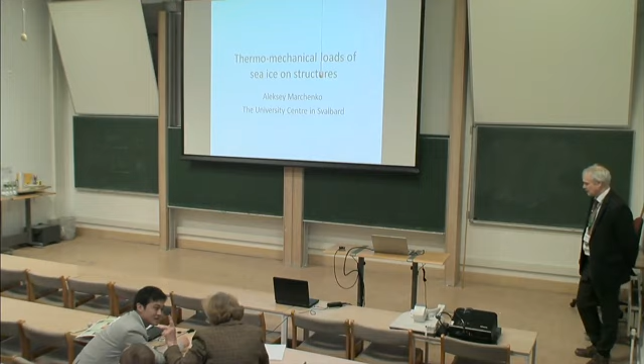Presentation is by our chairman, Aleksey Marchenko, titled Thermo-mechanical Loads of Sea Ice on Structures. One hour, please. Yeah. So I built up my presentation in

three portions. In the first portion I will give information known from the literature, and in the second part I will describe 3 examples of such type of interaction observed in Spitsbergen, and the biggest part, the last part, is the analysis of that interaction. The information about ice-structure interaction you may find, for example, in the book of Sanderson, and

he said that there are 2 types of interaction when temperature is changed. Ice expands and may produce loads on the construction if ice is confined inside the construction. And the second type of interaction is when ice is partially confined between a local structure and, for example, the shoreline. In that case, ice thermal expansion will influence load on the structure.

He also mentioned that, of course, thermal load could be big, but there is a time for temperature to penetrate inside the ice due to heat transfer, and this time is not short. For example, to get to 1.5 meter depth, we need almost 100 days. Therefore, weather changes may influence ice temperature, but not very deep.

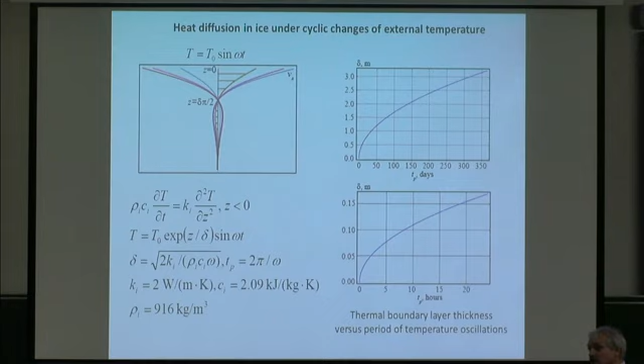So then, if you go for deformation of ice, if temperature penetrates deeply into the ice over some time, then creep could be important, and therefore thermal loads are significant only when temperature changes suddenly. If temperature changes slowly, thermal loads are reduced due to stress relaxation.

In this simple model, which is formulated for thermal loads, thermal loads are in balance with elastic stresses and creep stresses with a representative constant and power law with n equal to 3. You see that if the representative time is, say, 10 hours, and you have a significant change of temperature of a few degrees, then creep is very important.

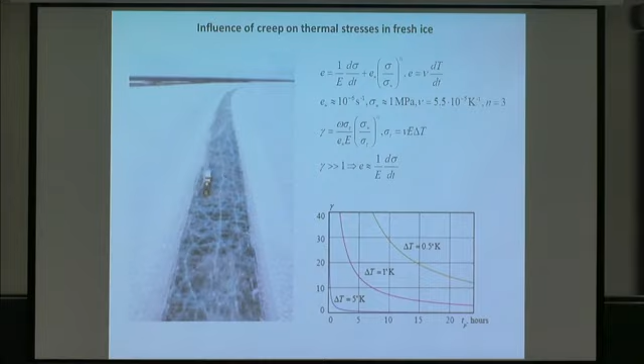If it is just 1 Kelvin degree, then creep is not so much, but still should be taken into account. Therefore, we have a combination of the coefficient of thermal expansion, creep, and temperature diffusion. So then, what do we have in practice in Spitsbergen?

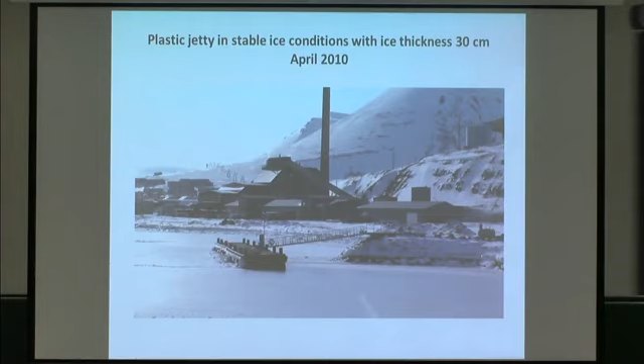What example? Here you see a floating pier, and it should survive over winter time, and in summer time it is used. Now it is much bigger. We don't have ice in the last years, but this was 2010. What we have in winter time, and what was not accounted for in the book of Sanderson, is tidal variation of water level.

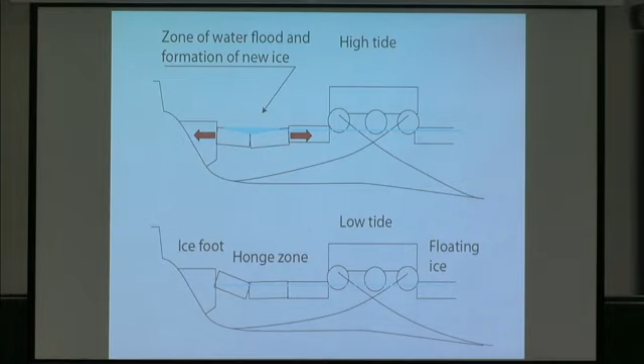Tidal variation of water level influences the formation of a hinge zone between the ice foot, which is frozen to the shore, and ice which is moving up and down. Inside the hinge zone we have a system of cracks, and the water penetrates through these cracks, freezes inside between the cracks, and pushes the structure offshore. For example, in 2011 the gangway was cut to avoid significant damage to the power cable.

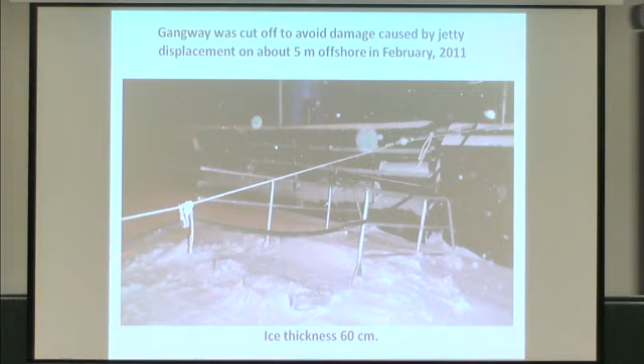Another example of combined action of tidal elevation of water level and ice creep offshore. You can see here there are 2 pipes. I installed these pipes with a thermistor string inside; I wanted just to compare temperature. One pipe was closed at the bottom, another not closed. Just wanted to measure temperature.

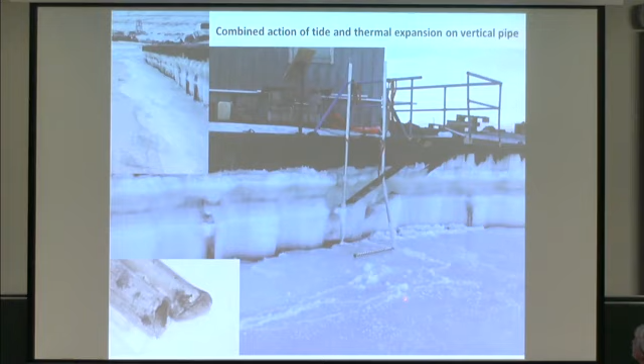One pipe was at the edge of this bridge; that is a small boat harbor, and here we have this bridge, and one pipe got into the gap between floating ice and the wall, and this pipe survived. The other pipe was broken in 2 weeks. The ice was a little bit creeping, at the same time moving up and down. That influenced bending, then the pipe was broken.

I call it cofferdam, and these cofferdams were filled with soil. The depth of water inside the cofferdam is 5 meters, and outside is 15. So that is like big columns. We discovered significant deformations of these cofferdam walls. This displacement was about 1 meter, from laser scanning. In winter time, this quay is not used, and ice is formed in the sea, and ice is formed inside the cofferdam.

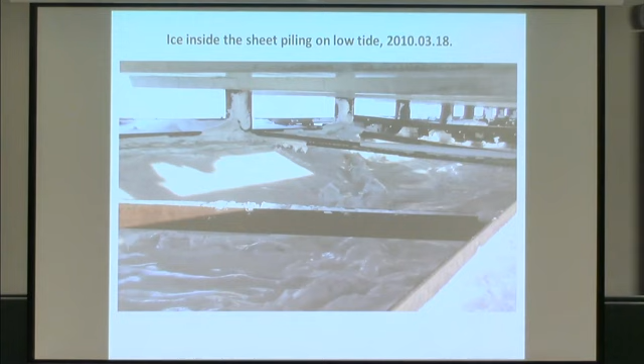So then you see in the figure how it looks when we have low tide. Then you see how it looks when we have high tide. So with the tide, the seawater penetrates through the ice, and the places where it penetrates are sometimes visible, sometimes not.

So the thickness of the ice inside the cofferdam is 2-3 meters. The thickness of ice in the sea is always less than 80 centimeters. And this big thickness is explained by this migration of water which freezes on the surface and not only on the bottom.

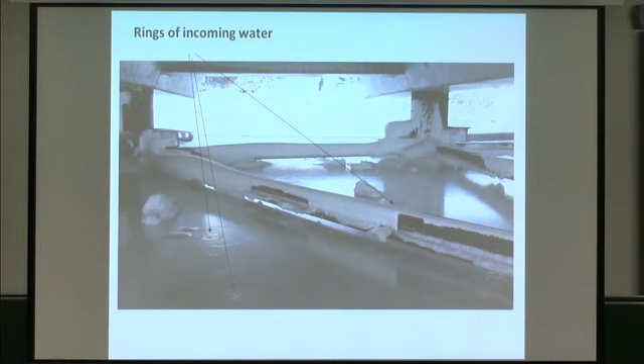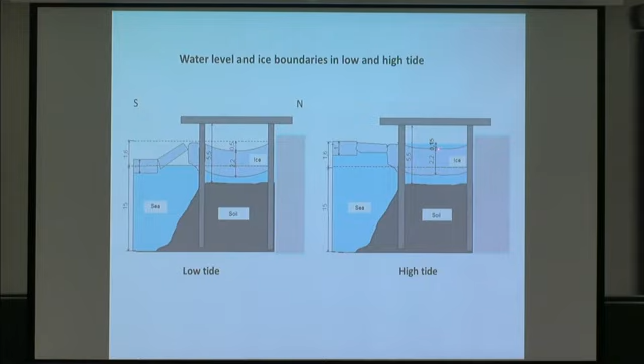So this is the schematic of what we have at low tide: we have this ice confined, hanging. At high tide we have water on the surface, and this depth can reach 15-20 centimeters. So, the structure of ice. We have very granular ice with small grains below the quay, and this is a horizontal section of floating ice in the sea.

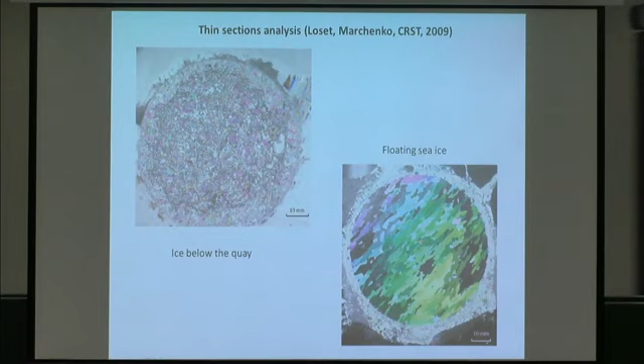So we observed significant variation of salinity from low water to high water. When the water level is going up, we have an increase of ice salinity. So I want to show

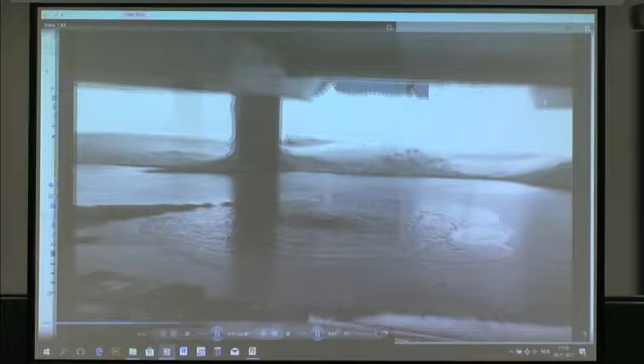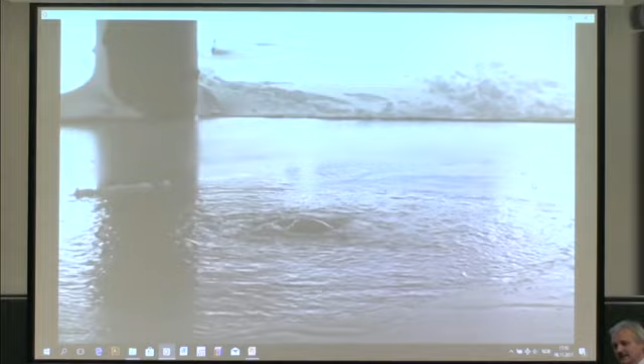if we drill through the ice, we did it once, then we have this situation. This is a hole drilled through the ice with an auger, and we got water coming and coming, and it never stopped. If we don't drill, then it is coming, but not with this fountain.

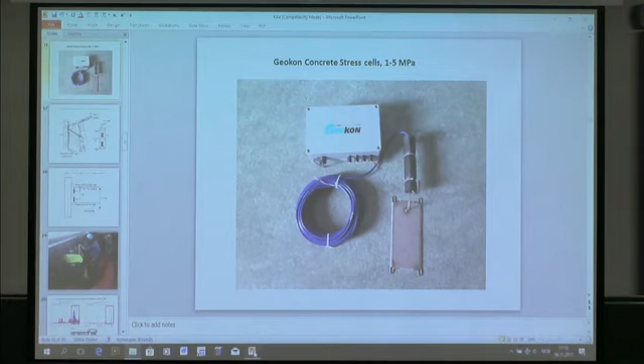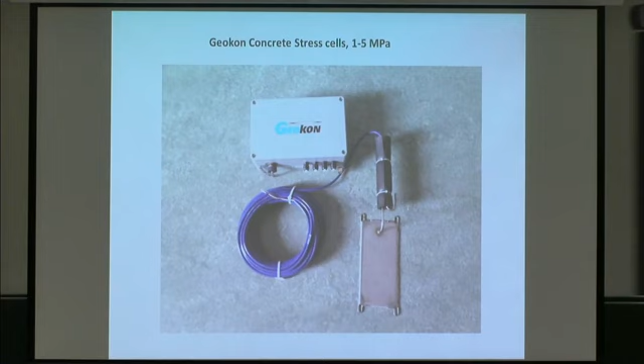So then we decided to investigate stresses exerted by ice on the walls of the cofferdam, because initially we were not sure that it came from the ice. Maybe these deformations were related to soil actions, because we have a big amount of soil inside. So we deployed these load cells on the walls of the cofferdam: this wall, which has significant deformation, and this seaside wall.

So here we screwed these load cells to a U-shaped beam, and then we brought this beam and screwed it to the sheet piling. You see the configuration: we wanted to have these loads below the water level. Therefore we needed to screw that with bolts to the sheet piling, and the most important thing was to fix

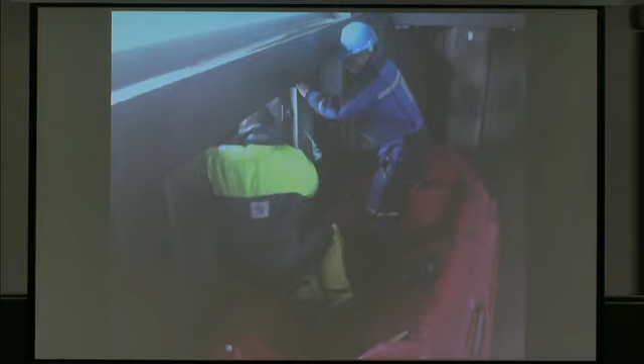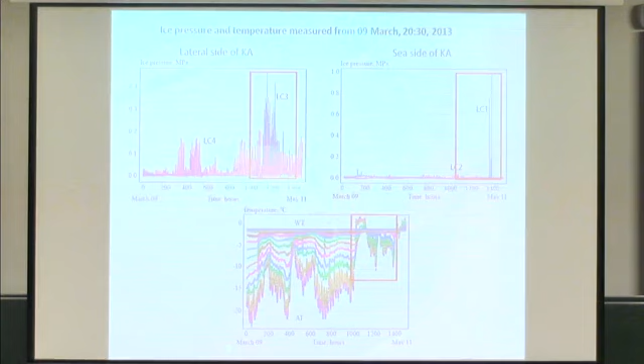the bottom bolt, because it was only possible to do at the lowest tide, and the lowest tide is in November, a completely dark time. So we had around half an hour to drill with a hand drill through the wall from a plastic boat inside the quay. We fixed the upper bolts at the right time, but the bottom bolts were more difficult. So then we got data.

2013 and 2015. 2014 was a warm winter, we didn't have ice loads, and 2016 as well. So we got records over 2 winters, and you see the maximal loads. There is some occasional load, but the maximal pressure we registered was up to half a megapascal, and these loads are oscillating. I will show more details, and it's important to see that the biggest loads were observed when air temperature was above -10, so in relatively warm weather at the end of the season.

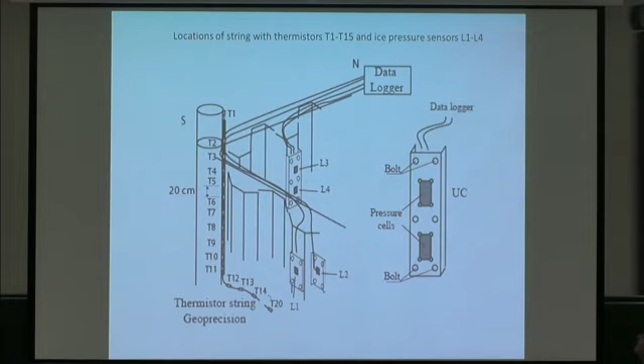So here, I forgot to tell that in addition to these load cells, we installed a thermistor string, which measures temperature inside a thin pipe on the inner side of this pile, every 20 centimeters. In addition, we have a thermistor string together with these load cells, at some distance from them, and we analyze both temperatures.

So there is an example of a temperature profile. The temperature profile is more or less stable: in the water we have the freezing point around -2, then some profile, and in the air we have air temperature. But around this mean profile we have temperature oscillations. In the air they follow air temperature oscillations, but in this spot they have a semi-diurnal period according to the tide.

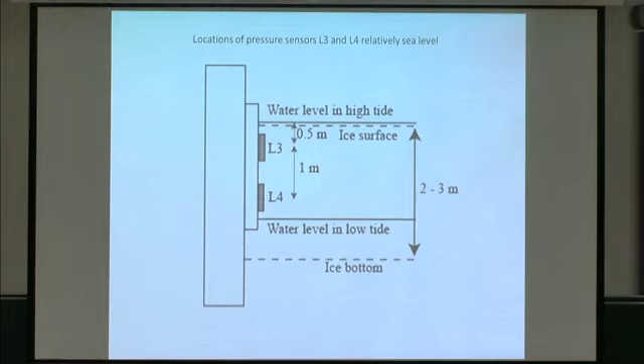And below in the water, of course, we don't have temperature oscillations. And if we compare load, load cell 3 is that, and 4 is deeper. So in this year, for example, you see this situation: load cell 3 has the highest loads, and the highest loads are reached with the lowest temperature.

But at some points it can be associated with the highest temperature. So we didn't always observe synchronization between temperature increase and load increase. Sometimes it does, sometimes not. The next record is from 2015; in this year we also recorded the tide in the same place. And we see that the biggest loads were observed when we have the biggest tide.

And the biggest load was mostly observed on the cofferdam wall with the most significant deformations. And also they were observed after this time when air temperature is not coldest, but maybe ice was thicker here.

We didn't measure ice continuously inside the cofferdam, because when ice begins to form, there is no solid ice inside. It is always broken, but starting from some point, it became solid. So then you see that there is some shift.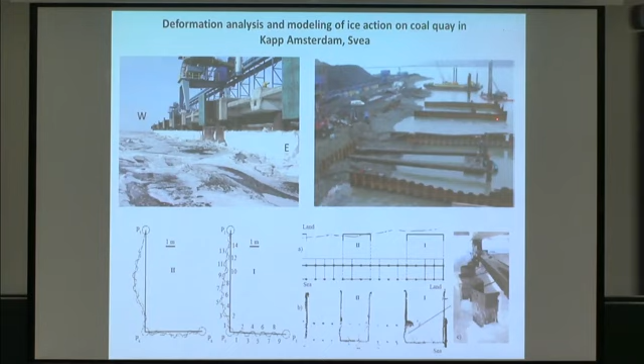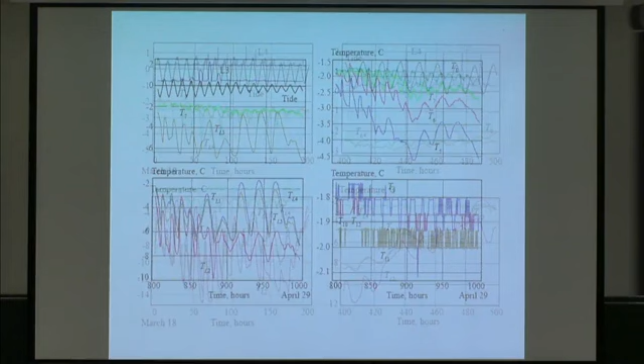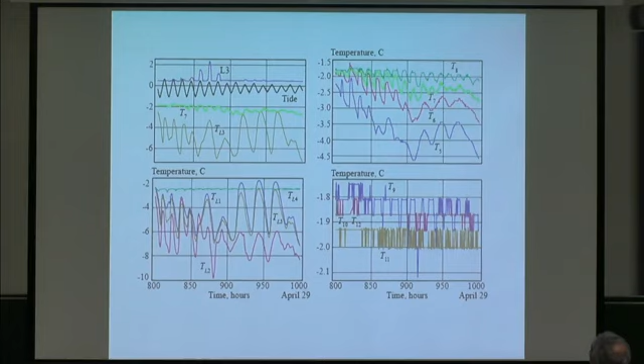So then here you see semidiurnal oscillations. They are quite visible in 2015 as well. Sometimes the highest loads were observed when we had synchronization between air temperature and temperature induced by tide. In that case we had these events. And there are no temperature oscillations in the water.

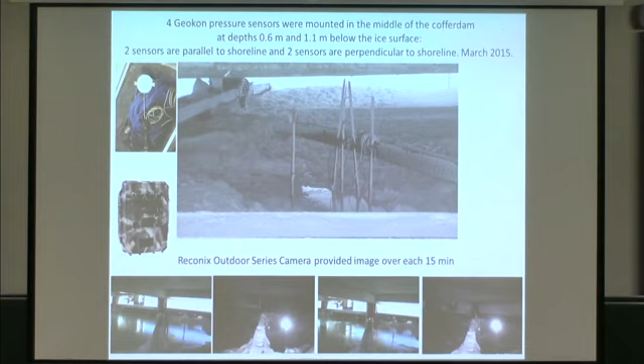That is very stable. Then we also deployed a sensor in the middle of the cofferdam to compare stresses measured in the walls and in the middle, and we also installed for several days a Reconyx camera, making video every 15 minutes. So I want to show you this example.

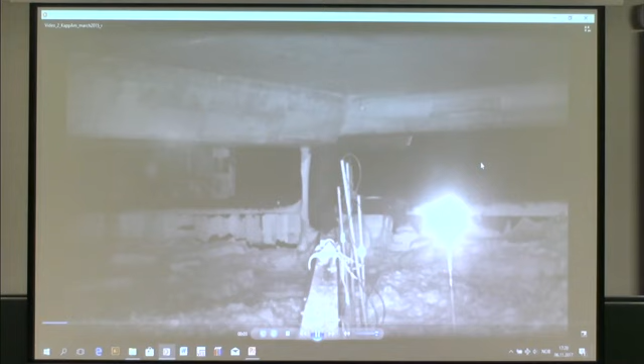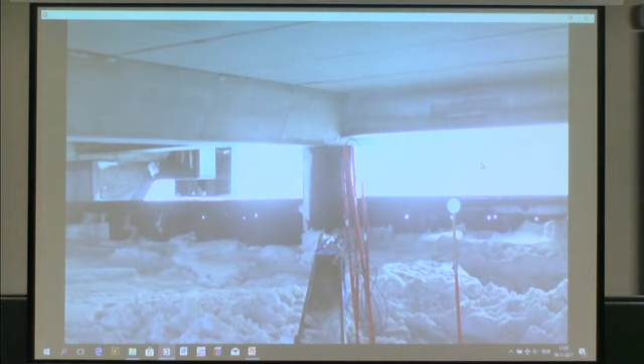So the ice is a little bit displaced. There is daytime variation, but the tide amplitude is changing because of moon phase. And then at a certain time we have water coming. So the weather is changing.

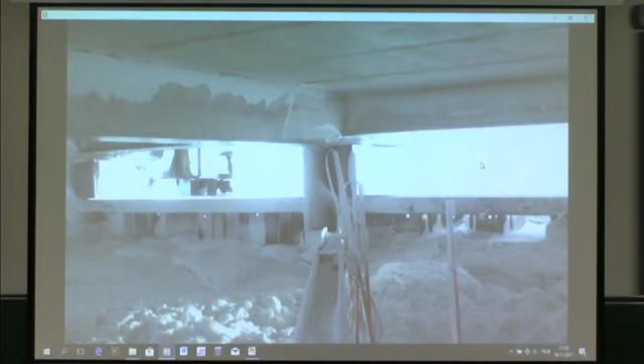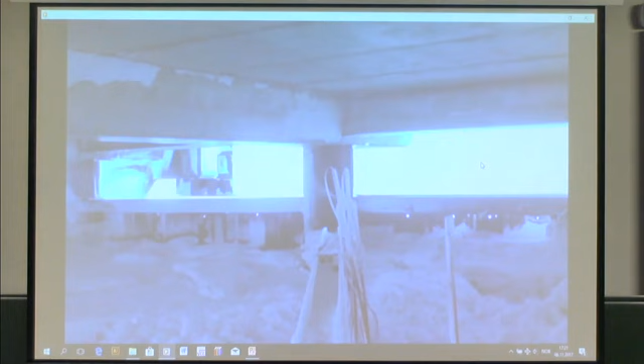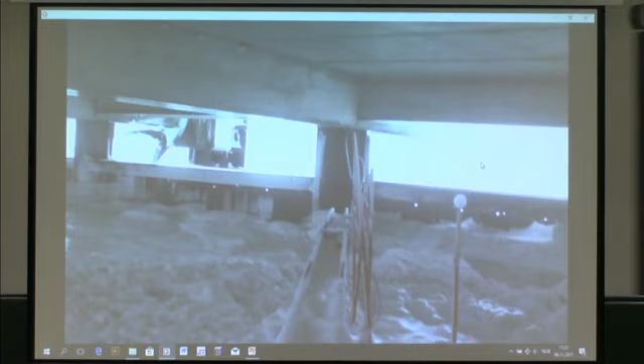Yeah. So the water appears not always, but when the tide is big, then we always have water. And the tidal variation of water level is changing from 1 meter to 2 meters.

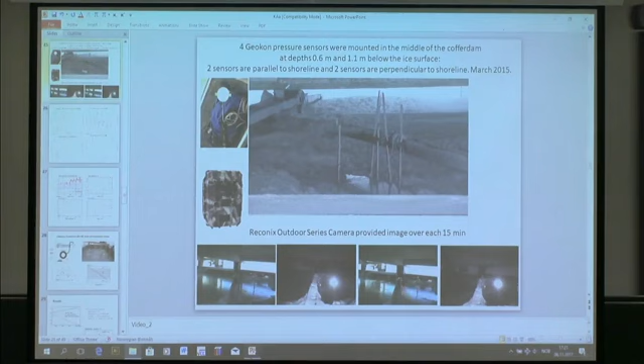But this, in addition, is recorded tide. In addition, the mean water level is also changing. So tide is changing around mean water level, but mean water level is changing because of other constituents of tides. So therefore, the process is not purely periodic.

But of course, we made a hole in the central part of this cofferdam, and that hole was filled with water. So maybe we influenced processes inside by drilling this hole, not through, but where we froze the sensors. But still, inside the hole, temperature variations were much smaller, and the ice was wet inside.

Here you see temperature variations inside the ice. They have a semi-diurnal period. And temperature variations on the surface have a diurnal period because of daylight and night. And we have variations of pressure with some shift from maximal tide in the central part of the cofferdam and recorded on the walls.

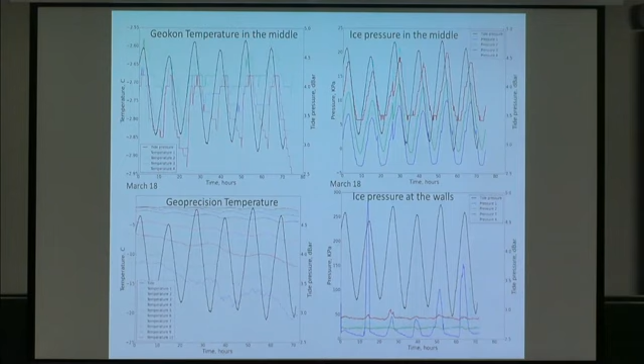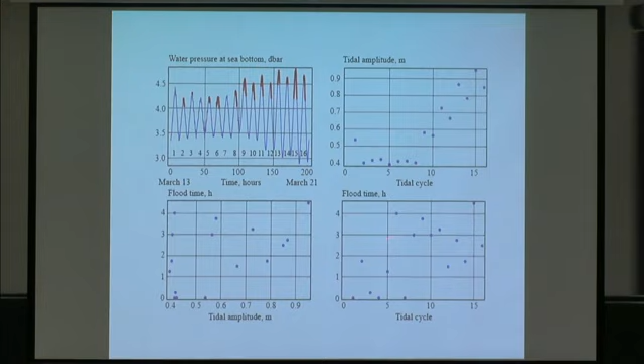On this picture, I calculated the duration of the flood period when tide water is high, and marked it with red. Tidal amplitude was changing and flood time also was changing, but we also observe something here: with a small tide we observe flood. I cannot explain that, but in general, of course, flood time increases with increasing tidal amplitude.

Of course, water can penetrate through some cracks. It is difficult to imagine that there are big cracks in 3 meter thick ice or 2 meter thick ice which is compressed and in cold weather. But still, to be sure that we observe migration through solid ice, we organized an experiment in the lab.

We have a tank that is 1 meter by 1/2 meter, you see the sizes here, and we place an air balloon inside the tank, create ice at the surface, then pump air into the balloon and measure it.

Deformations of ice and deformations of wall with fiber optic sensors. Temperature in the room was -10. So then here we have thermistor string, and here we have strain sensor, and here we have another strain sensor.

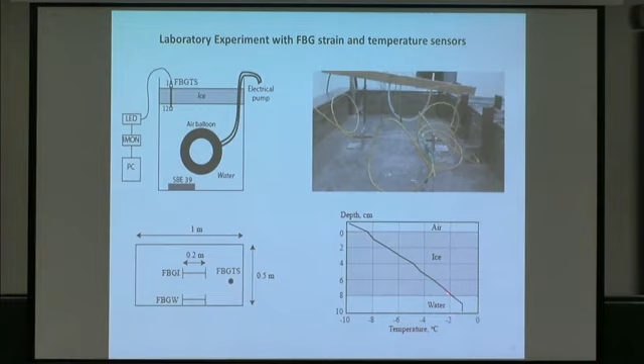The temperature profile was just linear, but around the temperature profile we have some variation. So then here you see results - that's increase of pressure in the tank.

At the same time, we observe increase of temperature inside ice, and zero shows room temperature. Room temperature was decreasing because of some reasons - that is how these fans work. But even if room temperature decreases, the temperature inside ice increases.

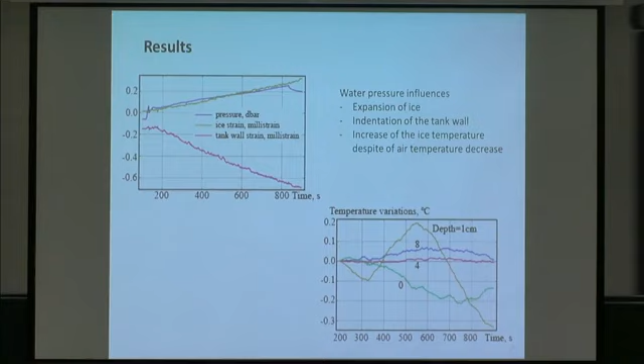So then, with this experiment, we confirm that pressure gradient over the ice contributes to brine migration through the ice.

I want to again show you a couple of videos, like visualization of this brine migration. So then here, this video, you see, this is solid ice at -10. You see this brine coming through the ice with thickness 10 centimeters. It is solid ice - I took a sample from that place after the experiment. That was solid ice.

So if we drop pressure below the ice, then we observe that the ice surface is dry. So then this brine is sucked down by water and going downward.

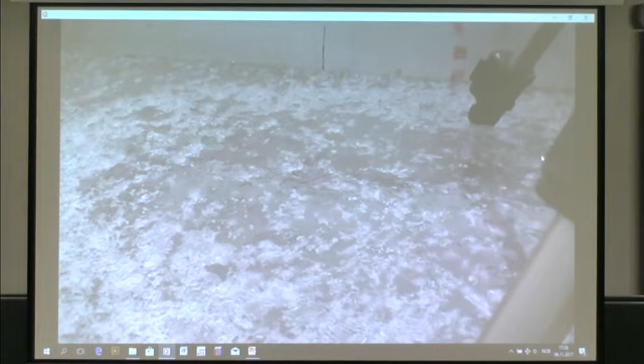And if we look from below on the ice, then we don't see anything initially, but after some time air is coming through the ice inside the tank. So you see many air bubbles.

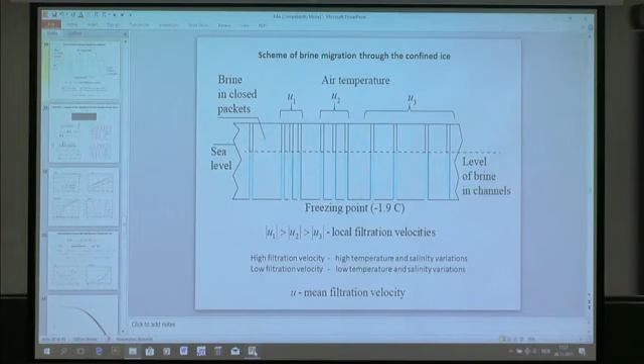So then, therefore, my vision of the process observed inside the cofferdam is shown here. Sea level is changing, and the ice is fixed. It is a little bit movable, but it is not floating - it is confined. So then, this ice inside the cofferdam includes closed brine volumes and channels, brine channels.

And these channels may have different concentration. In some places we may have high concentration of channels going through the ice, and in these places we observe these rings. In other places, concentration of channels is different, so therefore filtration velocity is not the same.

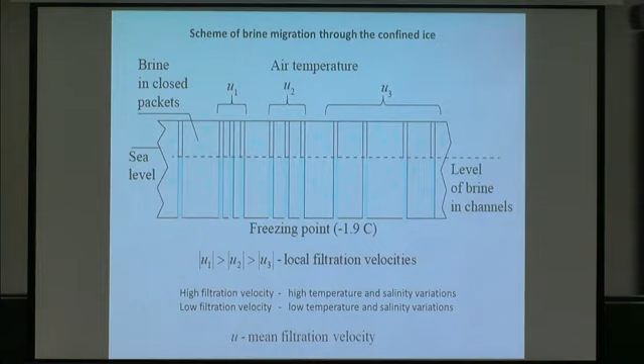And for the process of thermal expansion, it is important - not rare regions with high filtration velocity are important, but regions which have some mean characteristics of filtration. So the model of this effect was elaborated based on Darcy's law.

We need to include in Darcy's law the permeability of this ice. So then we integrate this through the ice thickness. We finally have this equation, and this term with theta function is responsible for the process.

When water level is above the ice, we have hydrostatic pressure, and pressure at the bottom changes according to a sinusoidal law. But we need to place in the model the mean water level with respect to the ice bottom. We don't know it, but it is a tuning parameter.

So then we introduce dimensionless variables, and we run the model, and it shows reasonable values when ice permeability is about 10 to the minus 10 square meters. So it is a reasonable value.

But this value of permeability is averaged over the entire area of ice. So it may come due to some channels, but in most of the region permeability is probably lower.

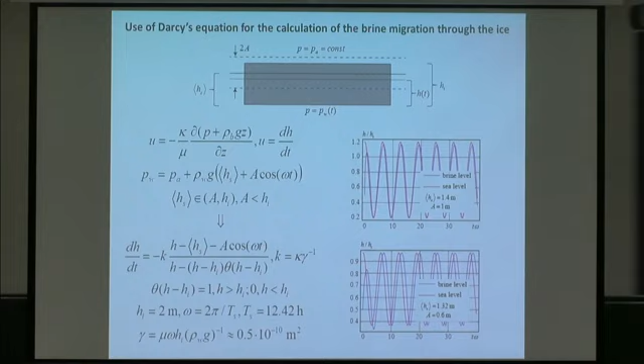So then we have, of course, some small delay, but amplitude of water level inside the cofferdam is almost the same as outside. So then, that is what we observe - filtration velocity about 0.1 millimeter per second.

So then water level and flood time relative to the ice is modeled up to half a meter, but we need to account that of course it is not a flat real surface, but it is like that. So therefore we may have mean level 10 centimeters, but in deep parts we may get it deeper.

So then next we want to model temperature inside. Temperature inside ice is the key parameter for the calculation of thermal expansion. So then we use for that the equation of heat transfer, and in this equation we substitute this heat advection with filtration velocity.

This is not exactly the filtration velocity which was reproduced with the Darcy model, but we have some coefficient alpha f, because as I mentioned we may have channels, and these channels don't have influence on the temperature in the ice body - they only have local influence.

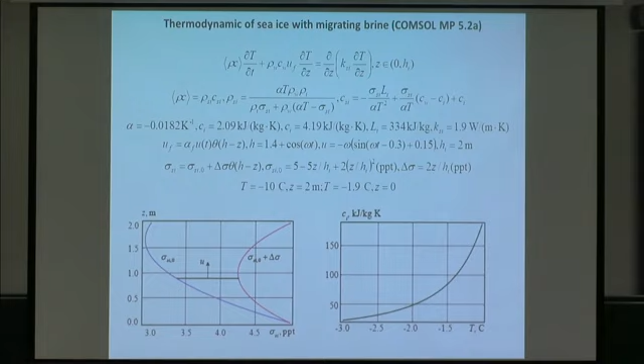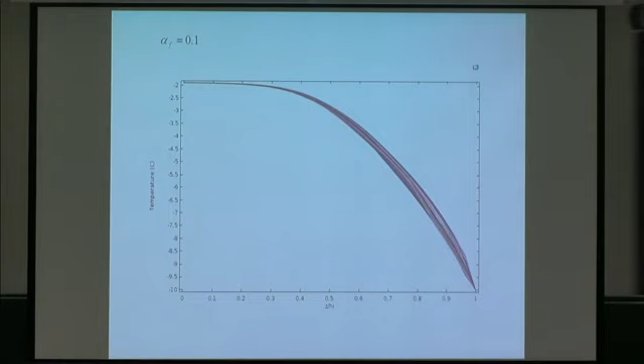With these parameters, we have a mean temperature profile which is changing over the tidal cycle, but it looks similar to natural profiles when we use coefficient 0.1. That means 90% of water on the ice surface appears due to migration through channels, but the rest, 10%, only moves through the ice body and influences temperature change inside the ice.

So here is the temperature variation. It looks similar to measured temperature variation, with a change of about 1 Kelvin.

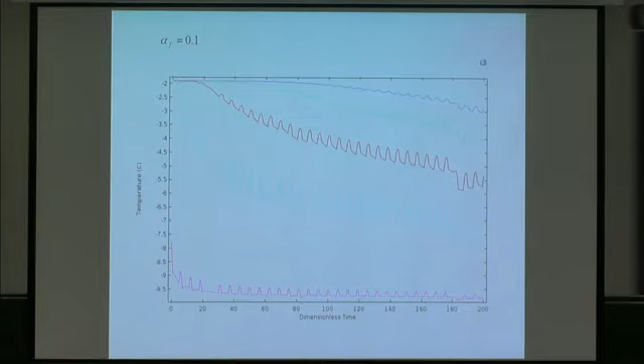If we assumed that all water migrates through the ice, we would have this picture instead, with very strong temperature variation. But anyway, these temperature variations, observed and modeled, can be explained only by periodical migration of brine through the entire ice column.

Now about stresses inside the ice. I use this equation again, but I need to substitute using dimensionless variables. I have a coefficient of thermal expansion, nu, and I substitute that as some constant multiplied by the coefficient of thermal expansion for fresh ice, which is 5.5 times 10 to the minus fifth per Kelvin. This is the linear coefficient of thermal expansion.

I use representative values for this constant, and 1 megapascal, 2 gigapascal for elastic modulus. So these two coefficients are 14 and 0.1.

If stresses are low, creep is not important. If stresses are high, creep is important. If we have the coefficient of thermal expansion for fresh ice and a temperature variation of 1 Celsius degree, where alpha T is the temperature amplitude, then creep is not important.

Here is the tide, and the blue curve shows oscillation of pressure inside the ice with amplitude 0.1 megapascal, close to observed values, but maximal observed values were close to 0.5. These were observed in 2013, with some phase shift.

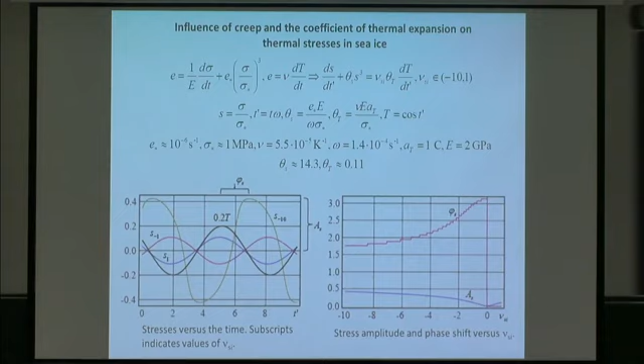I got this value when the coefficient of thermal expansion is negative, when this term is equal to -10. So the coefficient of thermal expansion can be negative, and this brings us back to the experiment of Malmgren.

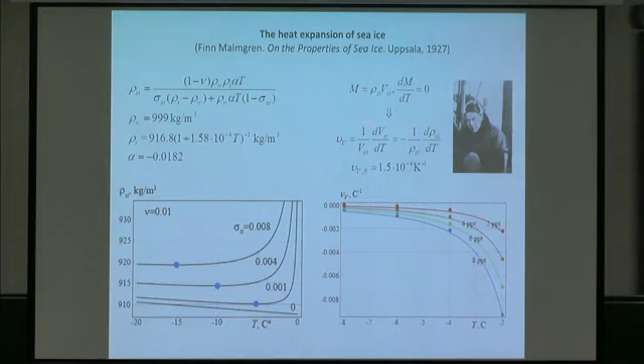These lines are calculated just using this definition of the coefficient of thermal expansion, using the density from Schwerdtfeger. But the point is that if the ice is permeable, we cannot assume that mass is constant, and this definition is not valid anymore. At this point I want to show you three sentences from different papers.

Gordon Cox, 1983, published that the coefficient of thermal expansion of sodium chloride ice and natural sea ice is the same as that of pure ice, because in saline ice the matrix of pure ice expands and contracts without regard to the localized phase change in the brine cavities.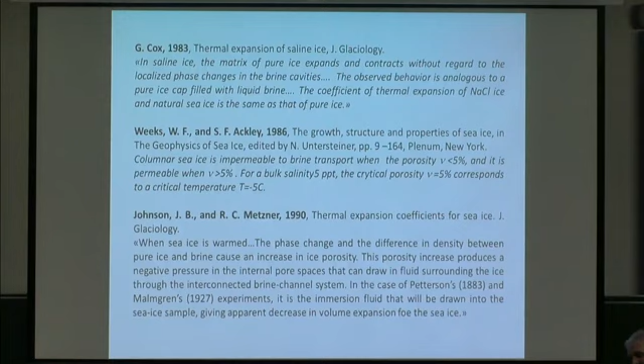So they said that Malmgren's experiment was not correct, because Malmgren placed a piece of ice in an iron tube, changed the temperature, and observed the change of petrol level around the piece of ice. He placed petrol, observed the change of petrol level, and based on those measurements concluded there was negative expansion. But Cox said that's not correct, because that was not real expansion of ice, but he measured the change in level because of brine movements out of and into the ice.

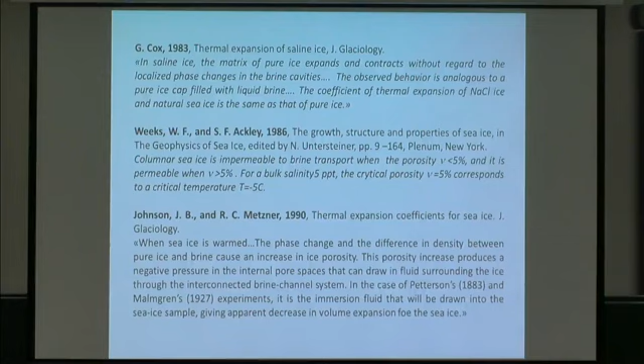Later, in 1990, this was confirmed by Johnson and Metzner. They published the results of experiments, and I think they mentioned Cox in their acknowledgements. They used a very small ice piece from landfast ice in Alaska, and they measured a positive coefficient of thermal expansion, but not the same as for fresh ice. Their conclusion was that this was a mistake in the experiment, and that the coefficient of thermal expansion is the same as for fresh ice, in saline ice.

But then Weeks and Ackley said that columnar sea ice is impermeable to brine transport when the porosity is less than 5% and salinity is less than 5 ppt, which is quite typical.

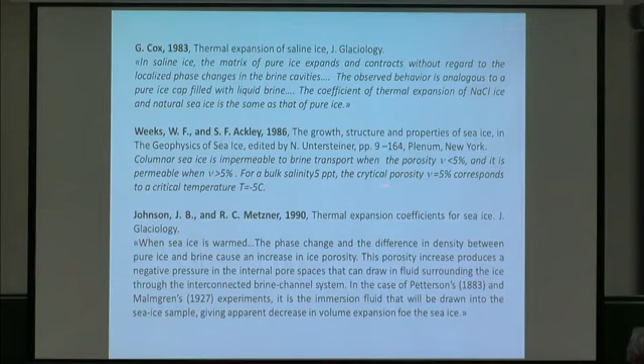So if ice is not permeable, that's evident there is a contradiction between these statements. Later Ken Golden together with colleagues performed an experiment about conductivity of brine cells in the ice, and they also supported the statement of Weeks and Ackley that when temperature is low, there are a lot of brine pockets which are not connected with each other, and when temperature is bigger, then they become connected.

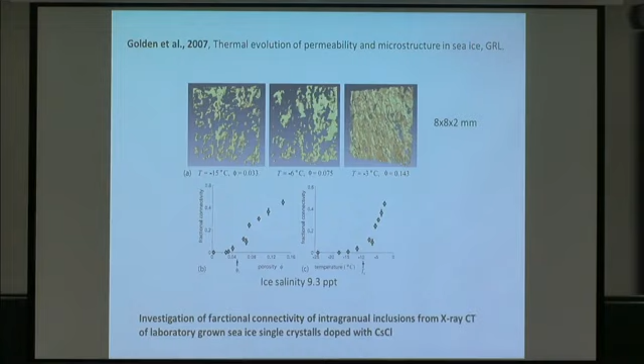I was thinking that maybe the main point is the size of the specimen. So we were searching for equipment to measure thermal expansion of bigger ice specimens, and we stopped on these fiber optic sensors, which are fixed on the specimen and measure with high frequency deformation and temperature inside. This is the temperature sensor. Then we place a plastic vessel around to avoid evaporation.

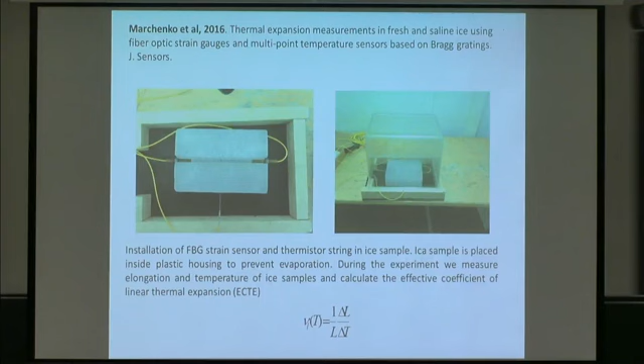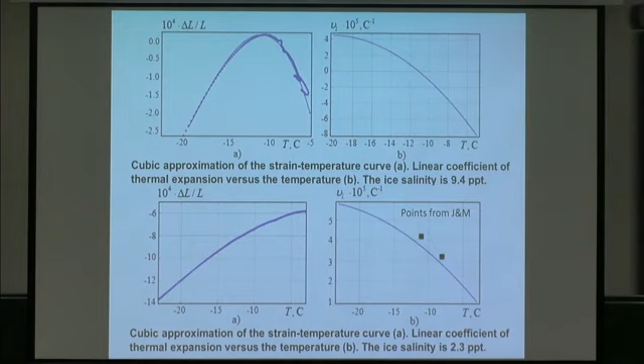Experiments were running over many days. We found that if ice is salty enough, then we may have a negative thermal expansion. When ice is 2.3 ppt, it is positive, but not the same as for fresh ice. Then we got 2 points from the Johnson and Metzner paper for the same salinity, and they fit very well with our measurements. So there is reason that the coefficient of thermal expansion could be negative inside the Cofferdam.

For this compression, we placed a pressure sensor at the bottom of each cell, which also measured temperature. In an extended hole from the plate, where ice had small compression, the water came through the ice bottom very quickly. In the hole just near the indentation plate, the water penetrated very, very slowly, and in other places it didn't penetrate at all. So this compression destroys the system of channels in ice, and brine cannot penetrate through the ice.

And this ice may have negative thermal expansion.

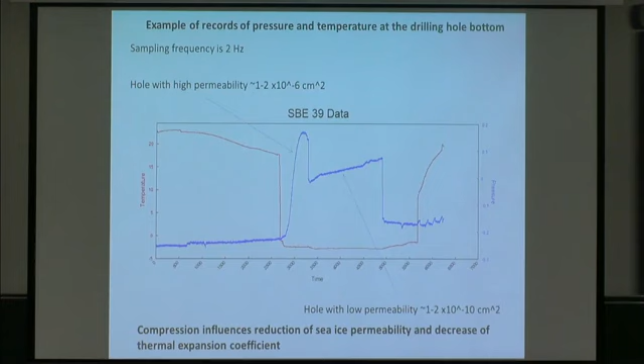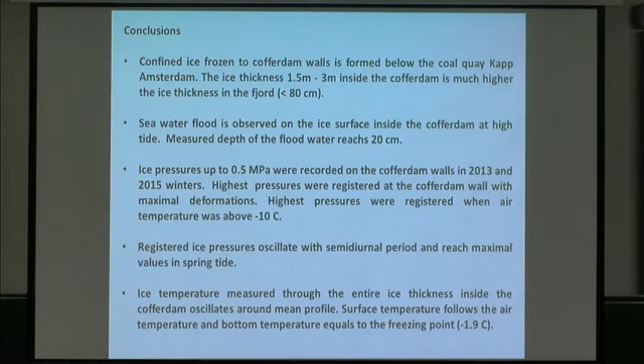Highest pressures were registered on the walls where we had maximal deformations, and when temperature was above -10. Registered pressures oscillate with a semi-diurnal period and reach maximal values where tide amplitude is maximal in spring tide. Ice temperature measured through the entire ice thickness inside the Cofferdam oscillates around a mean profile. Surface temperature follows the air temperature, and temperature at the bottom equals the water temperature.

Semi-diurnal oscillations of temperature are most visible in the middle part of the ice, with amplitude varying from some tenths of a Kelvin degree to 2-4 Kelvin, depending on the place inside the Cofferdam. Semi-diurnal oscillation of ice temperature follows the tide. Temperature increases with increase of sea level. Highest ice pressure is mostly observed at high water time with highest ice temperature. Phase shift of highest ice pressure with respect to highest ice temperature, up to 6 hours, was observed in 2013.

Water migration through solid ice was observed in laboratory conditions. Mean filtration velocity of brine through the ice in Kapp Amsterdam was estimated below 0.1 millimeter per second, and mean ice permeability is about 10 to the -10. Semi-diurnal oscillations are reproduced with the heat transfer equation, where we substitute filtration velocity at 1/10 of the mean filtration velocity over the entire ice thickness. The heat transfer equation takes into account heat advection due to brine migration and the time-dependent profile of ice salinity.

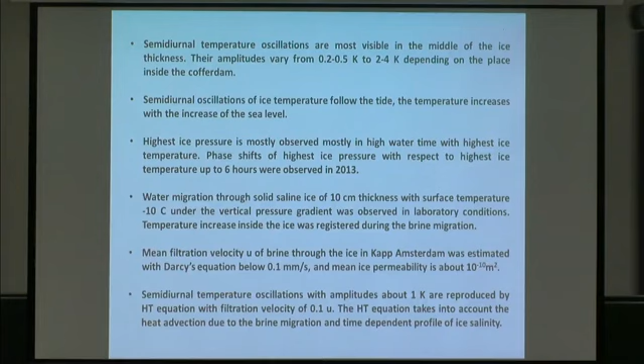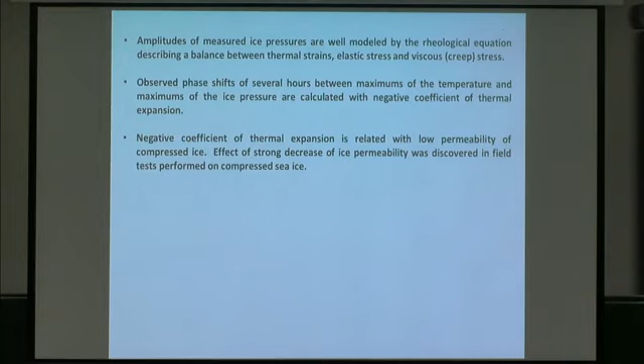Amplitudes of measured ice pressures are well modeled by the rheological equation describing a balance between thermal strains, elastic stress, and viscous stress. The observed shift of several hours between maximum temperature and maximum ice pressure is calculated with a negative coefficient of thermal expansion. This negative coefficient of thermal expansion is related to low permeability of compressed ice. The effect of strong decrease of ice permeability was discovered in field tests performed on compressed sea ice.

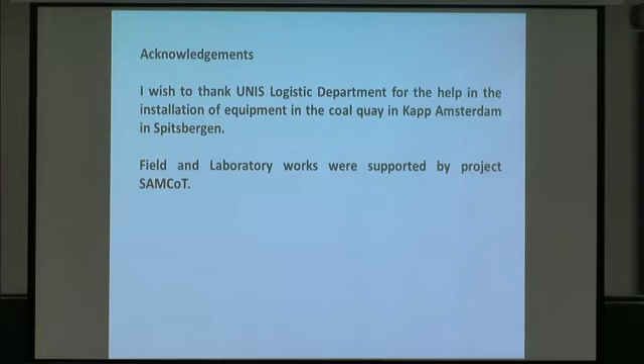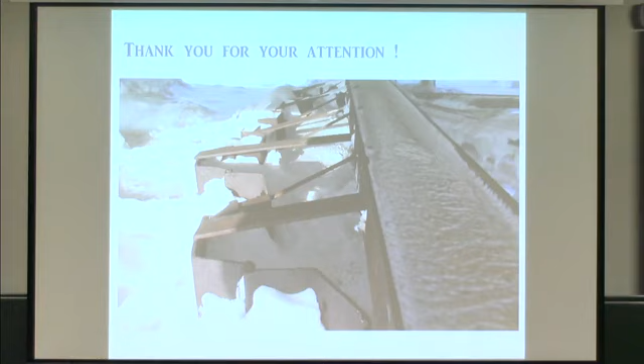Here you see the current situation. Actually, these workers in the coal company, they weld - this distance is growing from year to year, and they weld thicker and thicker plates here. But now the coal company has finished activity in Svalbard, so we have a good site for observations.

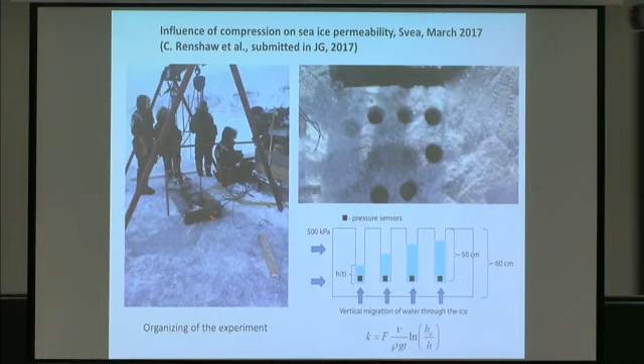I think that there is some critical value of compression which is able to destroy the porous space. And what it gives, we don't know. We only performed the first set of experiments, and we want to repeat that. Also I think that the permeability will be reconstructed after the compression, not immediately. It will take some time to get to the initial state. After this experiment, we repeated it with load cells frozen in the ice, compressed the ice and then dropped the load. And there was a very long relaxation time for the load cells frozen in places with maximal compression.

Is it right that the water which comes to the surface from below has a higher salinity than the average water? Of course, because everything is in equilibrium with air temperature. In laboratory conditions, in the ice tank, the ice is frozen to the walls. When the air temperature is low, ice grows downward and increases pressure inside the water. Therefore, we always have some liquid film on the ice surface, even at -20, but with 100 ppt salinity. Very high salinity on the surface. So it's not frozen, or frozen but very slowly? It is not frozen because it has very high salinity.